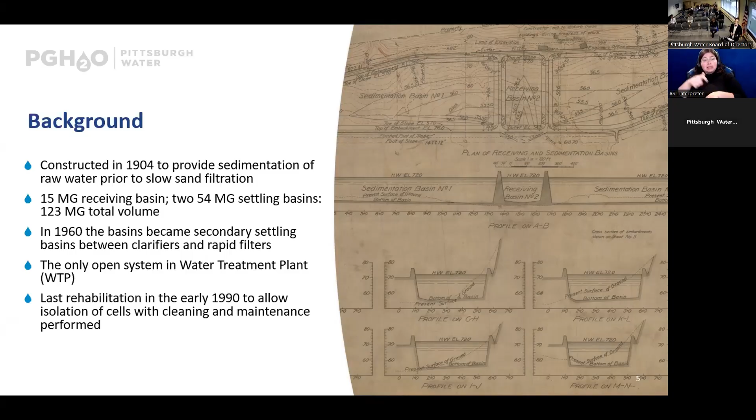So just a main point of knowledge for anyone concerned from the public: these open basins are not finished water. They are in the middle of our treatment process, and it's the only open system in our treatment process. They were last rehabilitated in the early 90s, cleaned out at that time and isolated one by one for cleaning and maintenance. So it's been a bit, it's been a minute since work was done.

So some more drone photos that we just took recently, showing east and west, and the center receiving basin. We do also have an administration building that is not being used, but is located there and will be evaluated for historical significance as part of the project.

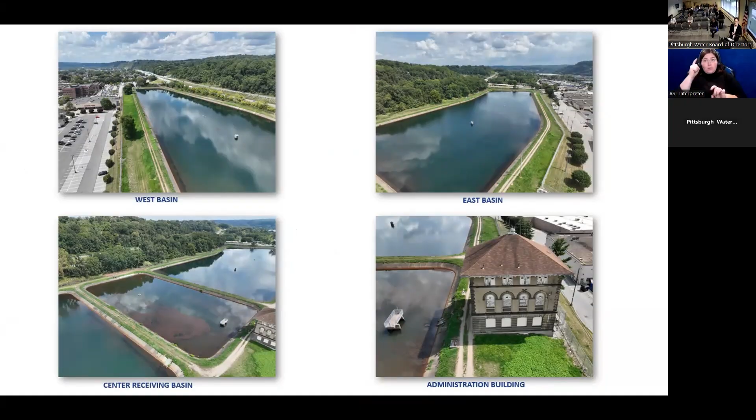So this project is divided into 2 phases. Of course, we will meet all current regulatory requirements and bring that up to speed, and then provide operational flexibility, resiliency, and redundancy. Under phase 1, we'll be primarily cleaning out the basins.

We did a bathymetric survey of the basins showing that there are approximately 2 to 3 feet of sediment in the bottom of them, roughly estimating 117,000 cubic yards of material. So quite a bit. Phase 1 will primarily focus on the removal of that sediment, as well as installing some upgrades.

We're going to put a screening unit on the east basin outlet. Currently, the basin outlet is not screened, so that presents some interesting opportunities at the filters. And we'll be either replacing or rehabilitating some of the isolation valves in preparation for phase 2 - draining valves and sluice gates.

Under phase 2, which is further out in the future, the plan is to install a covered multi-cell basin in the footprint of the current west basin. So we will eventually be covering this process. At that time, we also plan to install some piping installation for possible additional upgrades further out in the future.

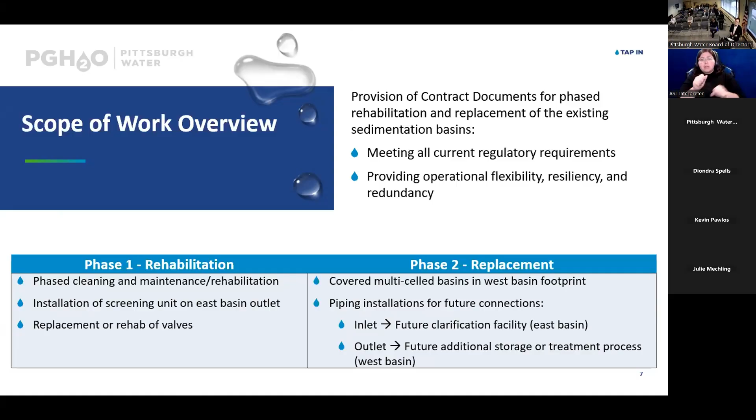So we might put in a future clarification facility in the footprint of the East Basin, and potential future additional storage or treatment process in the remaining space in the footprint of the west basin.

So this is a little bit easier seen with this graphic. The dotted yellow line, very loosely at this point, represents the potential footprint for the covered basins that will be installed under phase 2. Then you can see that eventually we will have some space available, as I mentioned, for possible future use of the footprint of the east basin or the remaining footprint of the west basin.

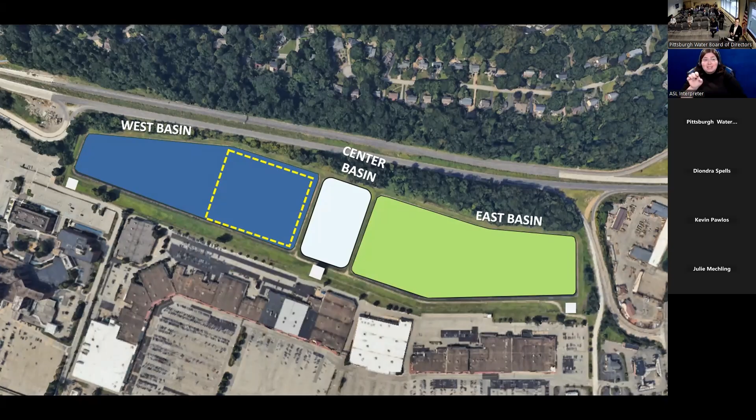So a little more detail on phase 1. Again, we'll be rehabbing or replacing existing sluice and drain gates to allow for positive isolation and bypass during the work. Again, we'll be installing a screening unit, and then we'll be doing phased cleaning of each basin - center, then east, and then west.

And we are doing a traffic impact analysis. Primarily for phase 1, there will be a major hauling operation, as you can imagine, with all that sediment. Even if it's dewatered, the estimated weight of a dewatered cake is 100,000 tons of material. So there's going to be some major hauling, even if we're able to dewater on site. That lends to the traffic impact analysis.

Related to that, we're looking at temporary site access road improvements. We do have an access road, but there's only currently one way in, one way out. So we are going to need some additional temporary access roads to facilitate the work.

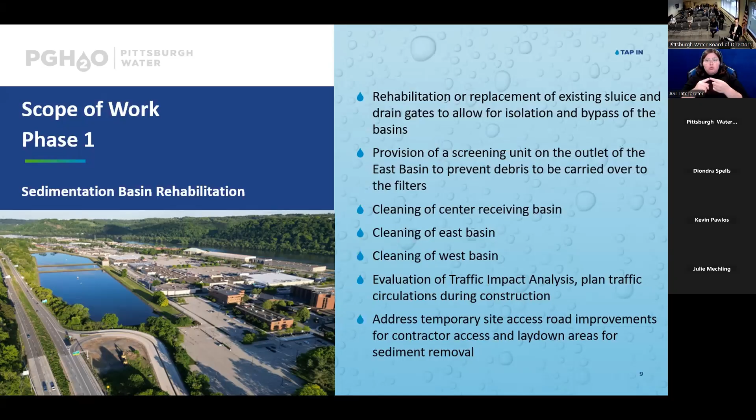And then a little bit more information on phase 2. Again, we're looking at converting a portion of that west basin footprint to a multi-cell covered basin that will take up less space than the current facilities. We will have water quality monitoring for each of the multi-cells. We will also address power and electrical needs, taking into consideration possible future treatment options.

Again, doing provisions, potentially installing some pipe so that we can potentially connect in the future for those upgrades. And then we will be looking at implementing sustainable design practices. We do have a design workshop, sustainability workshop, scheduled for next week to talk about some of that, which could include energy efficiency, solar panels, and other considerations.

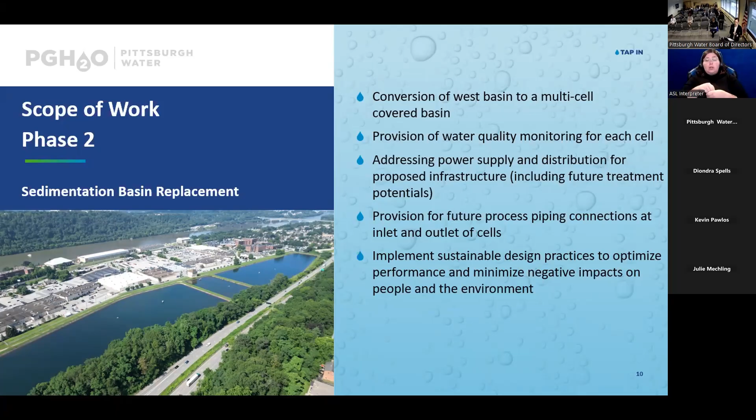So this is an interesting and exciting project. Some of the opportunities, as Barry would say, shout out to Barry. We do have very limited space on site, as you probably noticed or have seen. And this is going to be a challenge not only for access, but also for the potential dewatering of that sediment, which would be helpful because that'll help us in the disposal. Again, as I mentioned, single point in ingress and egress.

We are coordinating heavily with, or will need to continue to coordinate with the surrounding property owners and look at potential easements for those temporary access roads that I mentioned, and also to try to find space for dewatering activities.

And then just noting some of the stakeholders, of course, the DEP, as always, Alcosan, PennDOT with Route 28, and attempting to work with them and removing some of the stormwater discharges from Route 28. UPMC St. Margaret and Waterworks Mall, from whom we may need to obtain temporary easements.

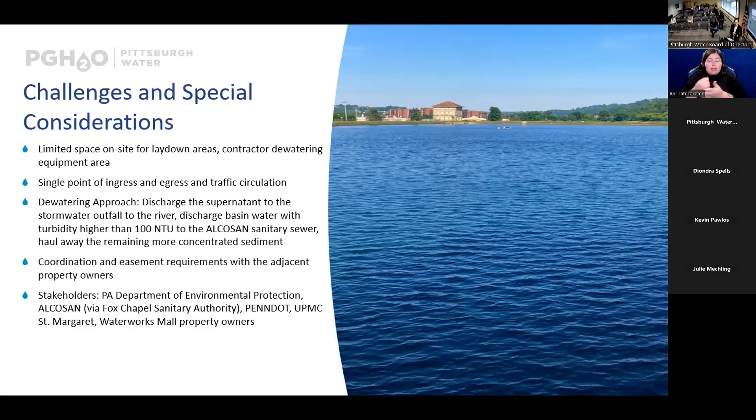As far as the schedule for this project, that is the last slide. We're doing design, permitting, and procurement for phase 1 currently, and that will continue through late summer 2026. And construction of phase 1, that cleaning portion, is anticipated to start fall of 2026 through the end of 2027.

And then phase 2, we are in design, permitting, early design at this time, which started this summer, and that will continue. Design, permitting, and procurement will continue through the end of 27, with construction anticipated 2028 through 2029 for phase 2.

High-level feasibility level cost estimates at this point for phase one, the midpoint of about 16.6 million. That is a feasibility level, so that represents a pre-30% design estimate. And then our phase two, very high-level strategic ballpark is looking upwards of 150 million, obviously going to be reviewed and potentially refined. We will be pursuing PENNVEST or other funding for that phase two. We're not able to use PENNVEST for phase one because it's considered maintenance, but we will be pursuing PENNVEST for phase two.

Moving on to an update on our lead service line replacement program. A total of 13,638 public and 10,332 private side lead service lines have been replaced through yesterday. We currently have 10 active construction contracts involving lead service line replacements in one way or another. These are a combination of small diameter water main replacement, neighborhood, and urgent contracts. And under these contracts, we're actively working in approximately 17 neighborhoods throughout the city.